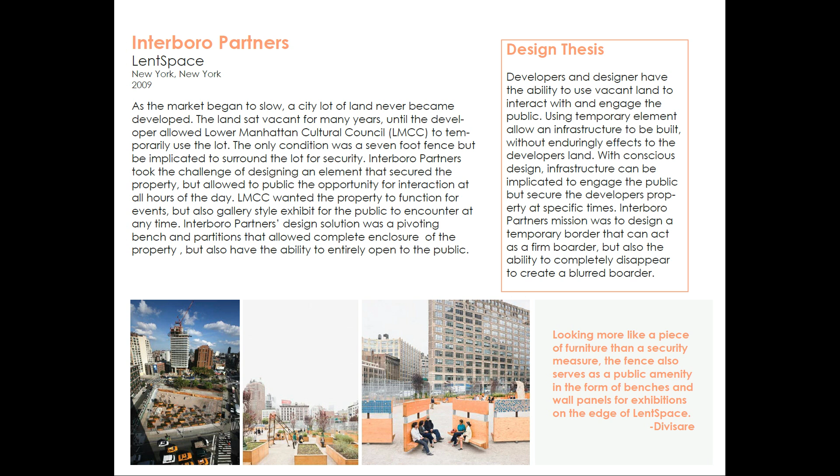This is a project where a vacant lot is temporarily converted into exhibit space for the Lower Manhattan Cultural Council in New York City. There are many discourses Lent Space addresses. The four that relate directly to my own thesis are visual and physical control, accessibility, private and public spaces, and temporary.

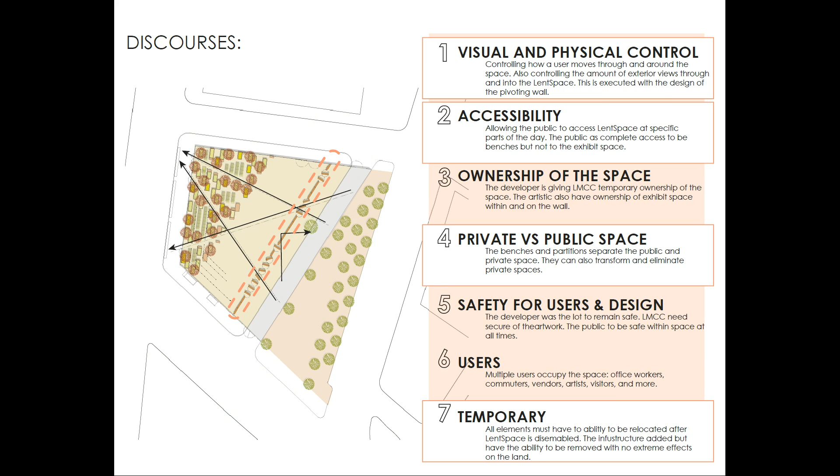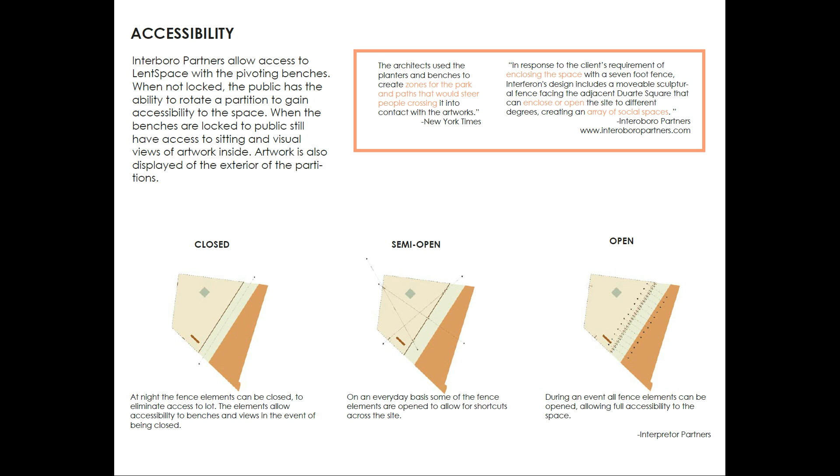The accessibility is directly related to these pivoting panels that are only located on one side. When they are all open, you are able to directly access the space. When they are all closed, you are not able to. They are also able to be in an in-between state that is semi-open.

These pivoting panels also relate to visual and physical control. When they are all closed, you are still able to visually see within from the slits at eye level. When they are completely open, the physical control allows you to access the lot. There are also two accesses that allow you from one side to the other side of the lot.

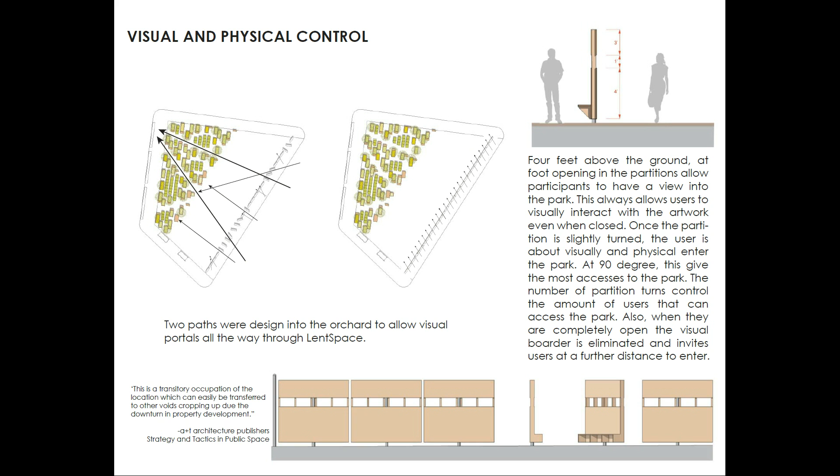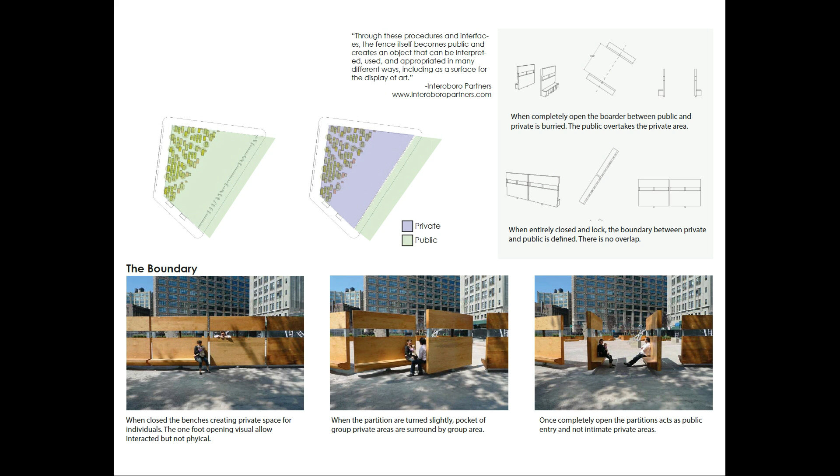These panels also address public versus private. When the panels are open, the space is public. When the panels are closed, the space is private, creating a boundary between.

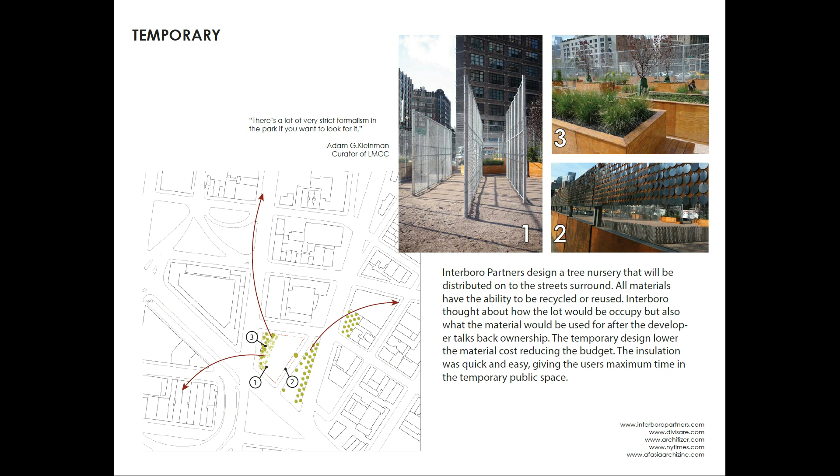The temporary part of this project is the material. The material is completely recyclable and reusable. The plants that are within the nursery are also designed to be relocated and distributed throughout the surrounding area.

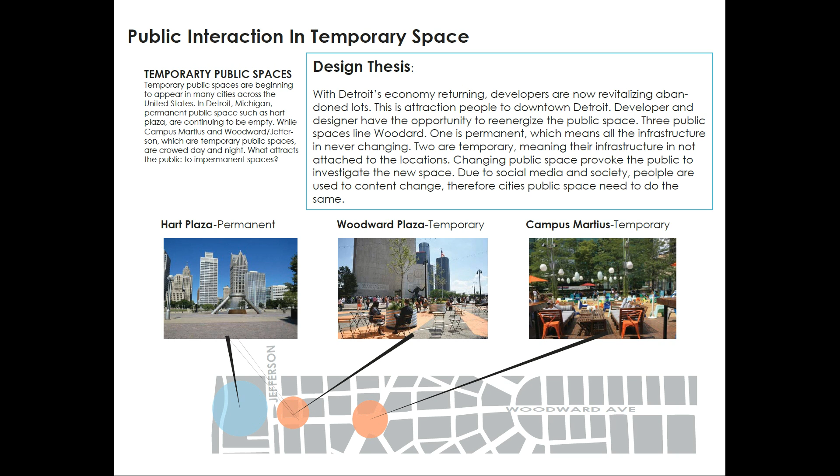My own thesis is looking into public spaces that are temporary. I looked directly at Detroit and how they use temporary spaces and also permanent spaces.

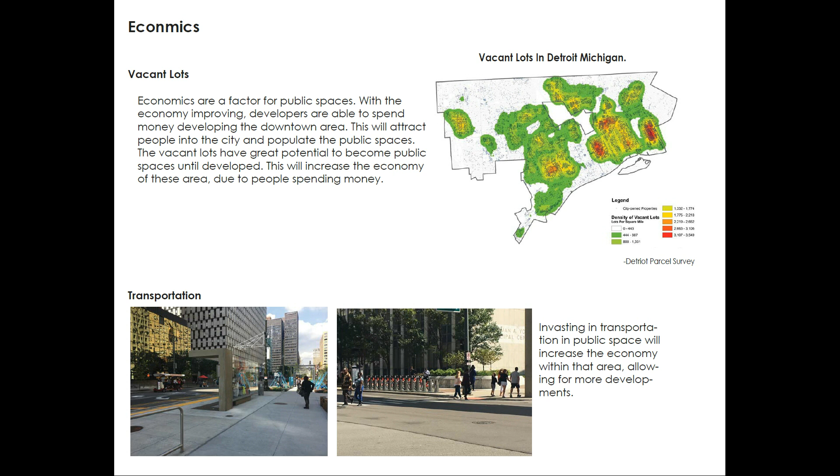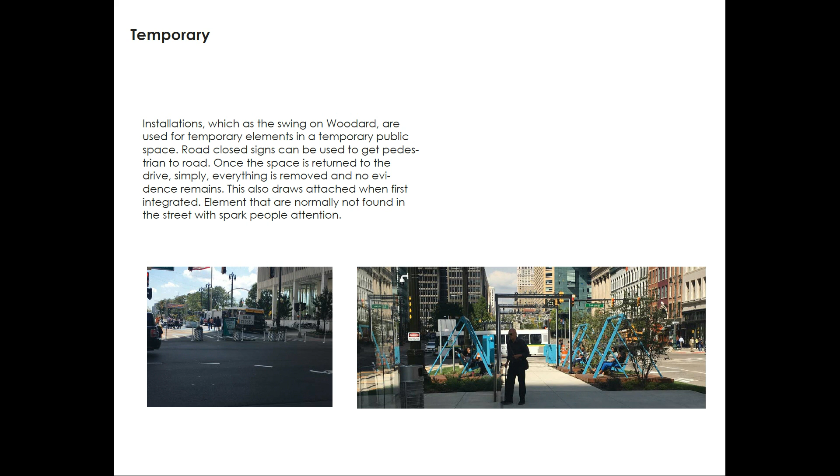The discourses I directly addressed are economics, constant change, enterprise, and temporary. The economics are directly related to the vacant spaces around Detroit and how public spaces are normally in dense areas. The temporary space looks at one specific area, Woodward, and how they closed Woodward down and used temporary elements such as swings to create a public space.

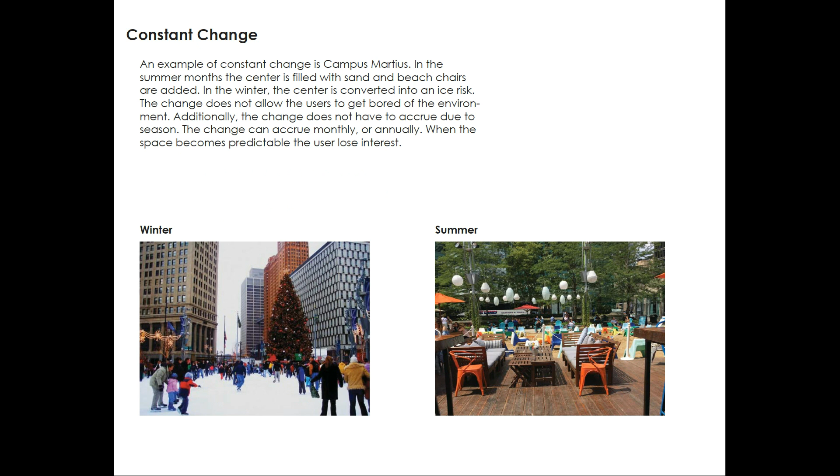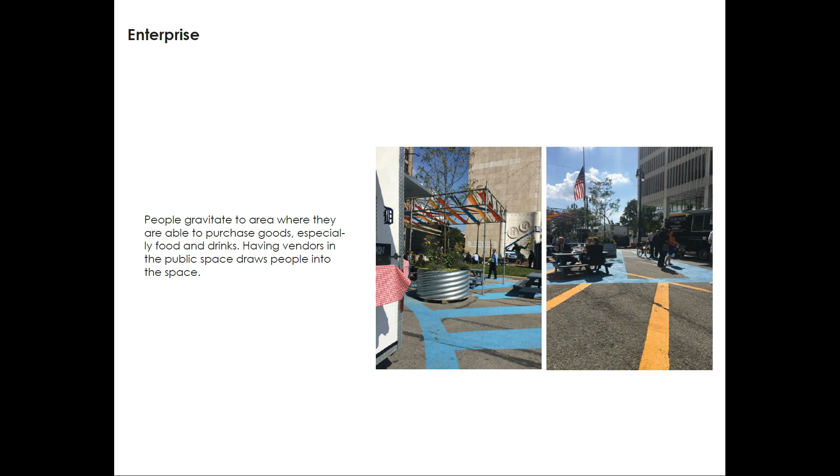Also looking at constant change, Campus Martius is constantly changing between seasons. In the winter, it is an ice skating rink. In the summer, it is a beach with a bar. Enterprise is a discourse because the public is directly interested in purchasing goods within a public space.

Looking at my own thesis, at this point I was unclear on where to take a direction. Therefore, I revisited my case study.

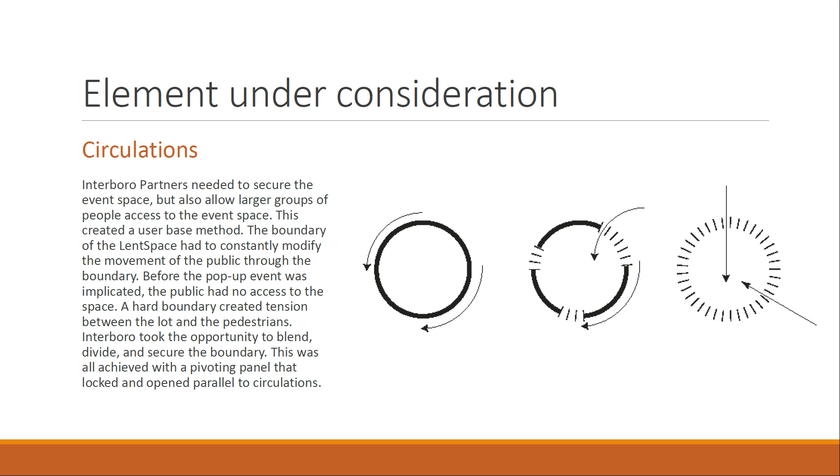Looking specifically at their research methods, I looked at how they addressed circulation. They knew that they needed to have a boundary that could be closed at certain points and open at others. They examined the edges of the space and realized that 3 of the 4 sides were heavily congested with traffic.

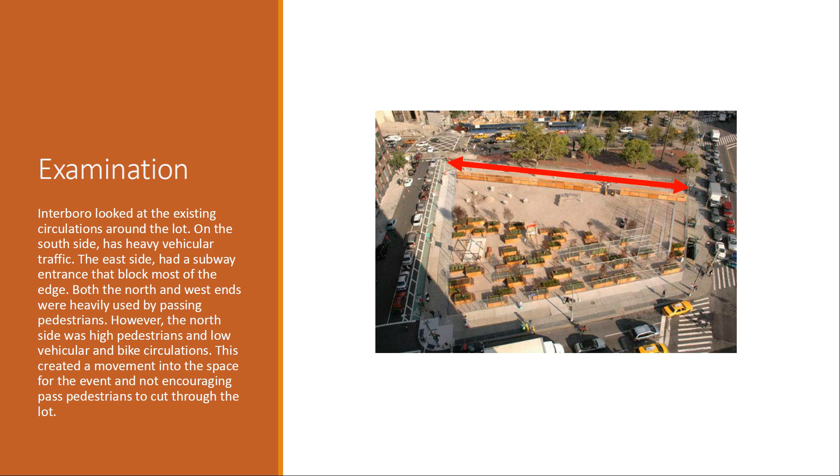On one side, there was no traffic allowed. Therefore, this was the best spot to allow access for pedestrians. The design of these panels allowed the space to be completely closed, completely open, or in an in-between state.

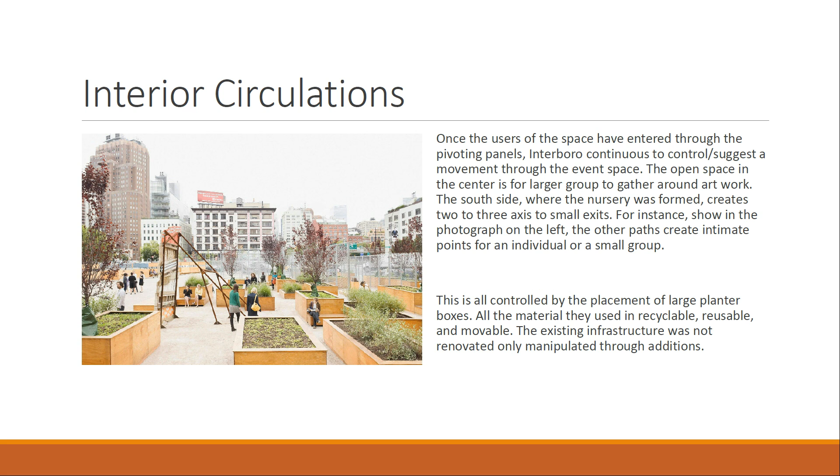The interior circulation is directly related to the program. The core allows large groups to gather for art exhibits, where the edges allow small groups or individuals to gather within the tree nursery. To develop my thesis more, I looked directly at pop-up architecture instead of a generic term of temporary.

I looked at pedestrian, traffic, and other modes of movement of circulation. I looked at different research methods, specifically looking at past architecture, mapping current installation, and circulation.

To define the circulation, I am looking at routes and paths through and around the built environment, specifically in how the pedestrians change their normal behavior due to the pop-up architecture.

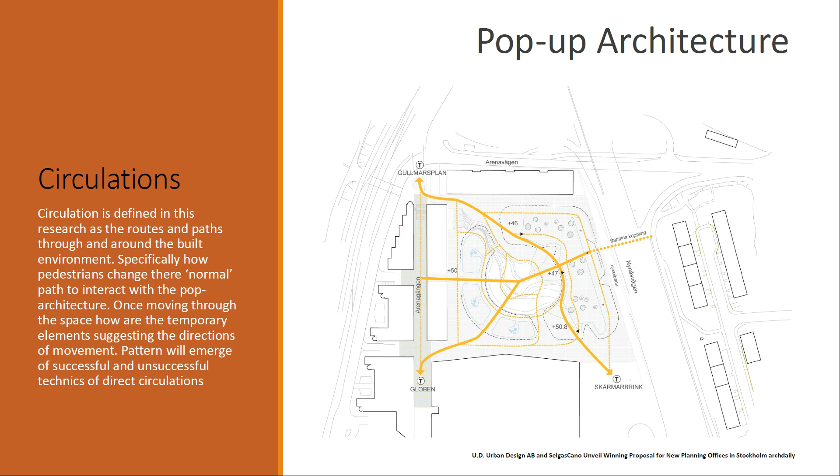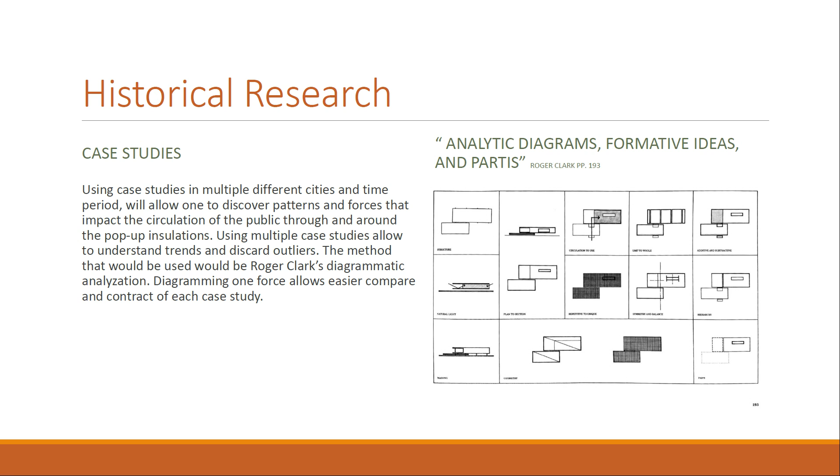Looking specifically at historic references that I am able to use as case studies, I will be able to examine them to look at patterns and forces. These patterns and forces will allow me to understand how things directly relate and how one has a cause and effect on another.

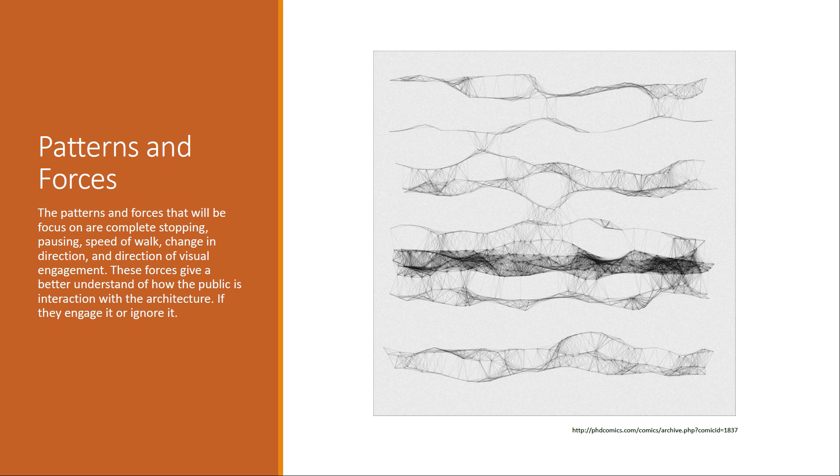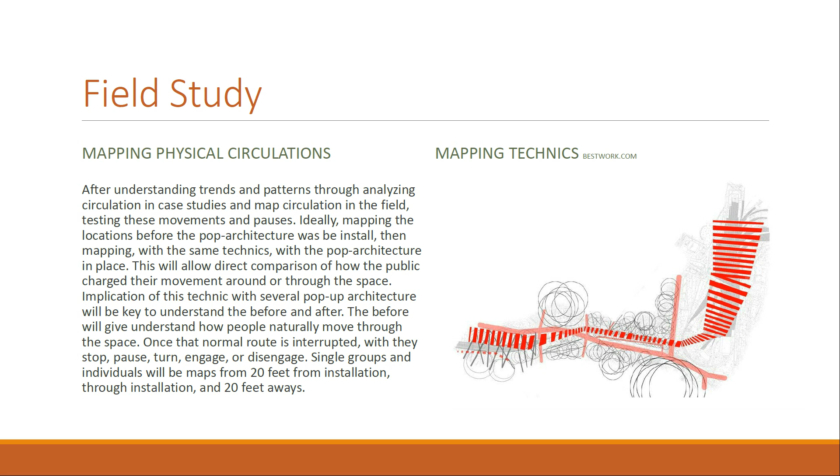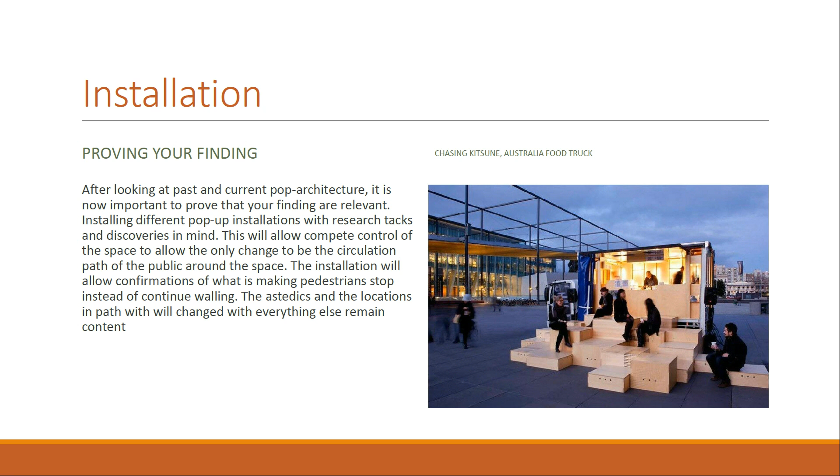Looking specifically at the field study, I will look at how pop-up architecture is impacting the circulation before and after it is installed. After understanding all of these things, I will then do an installation and be able to manipulate one or two variables. Therefore, I know exactly how the public is directly related to these.

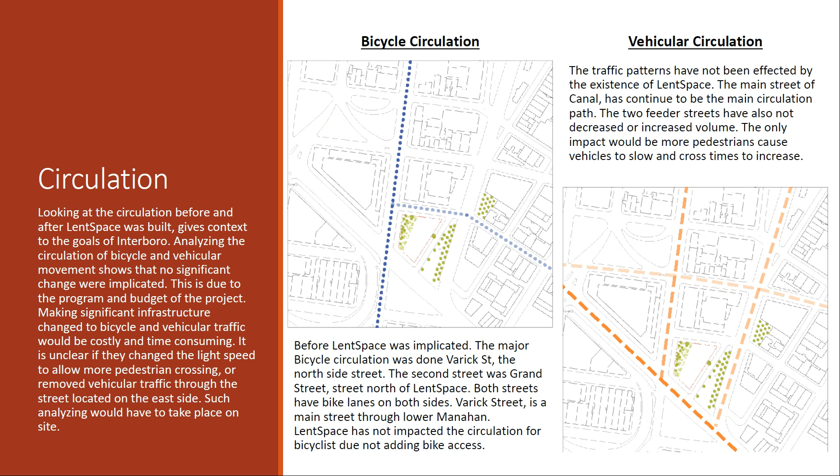Returning to my case study, I am now looking at the context within. Looking at the circulation and how they addressed it, there's no major changes between the bicyclists and the vehicle circulation. This is due to how hard it is to temporarily block traffic, where pedestrians are able to choose their path by visual cues. The before and after of this circulation is clearly defined.

Before, there was no interior circulation. Now, on one side, there's multiple paths that you are able to enter into the space. There's only 3 other spots that you're able to exit, not through the pivoting panels.

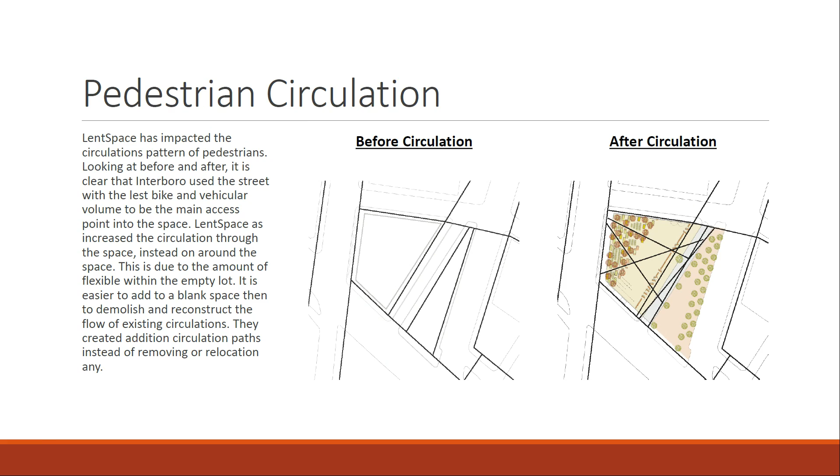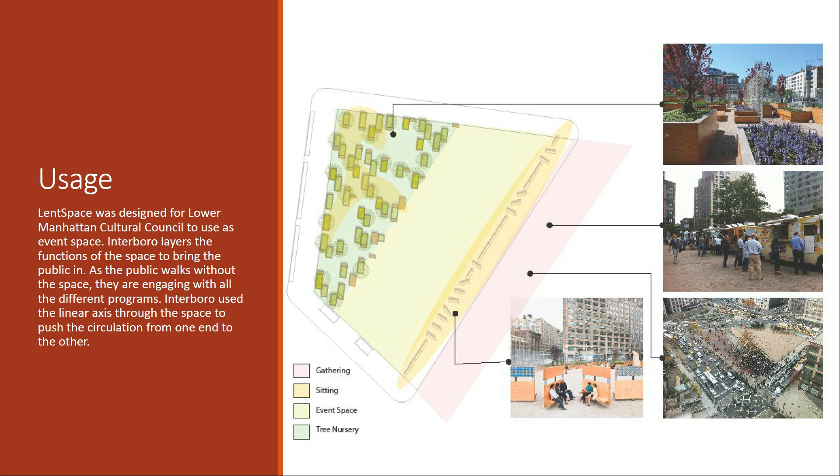The uses of this space are gathering, sitting, event space, and the nursery. They are layered on top of each other, allowing the public to access all of these different events while passing through. The materiality is completely recycled

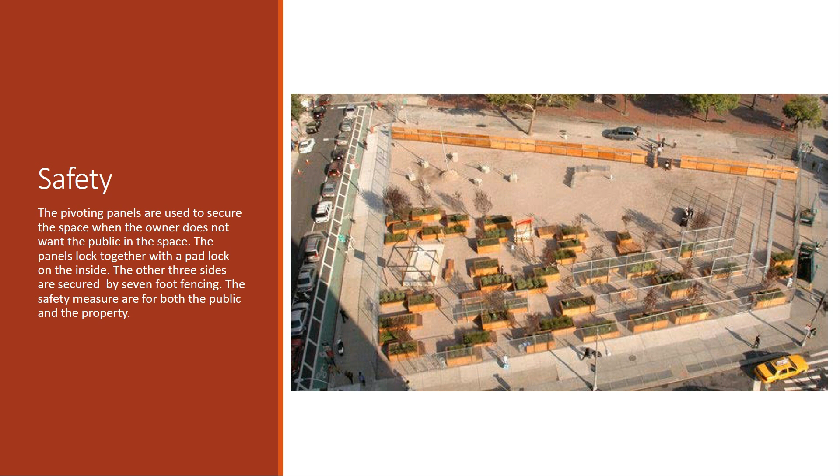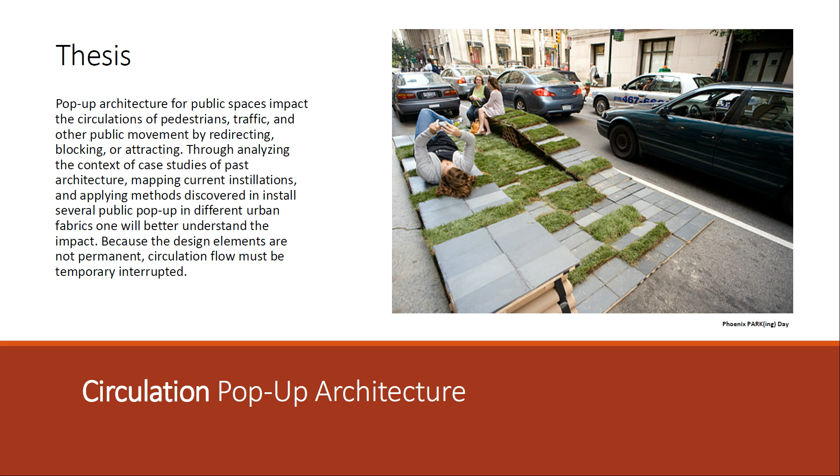and not permanently attached to the site. It is also a safety reason to keep some of these panels completely closed, therefore limiting the access into the site for the public. In my thesis, I began to look at how specific pop-up architecture impacts the circulation.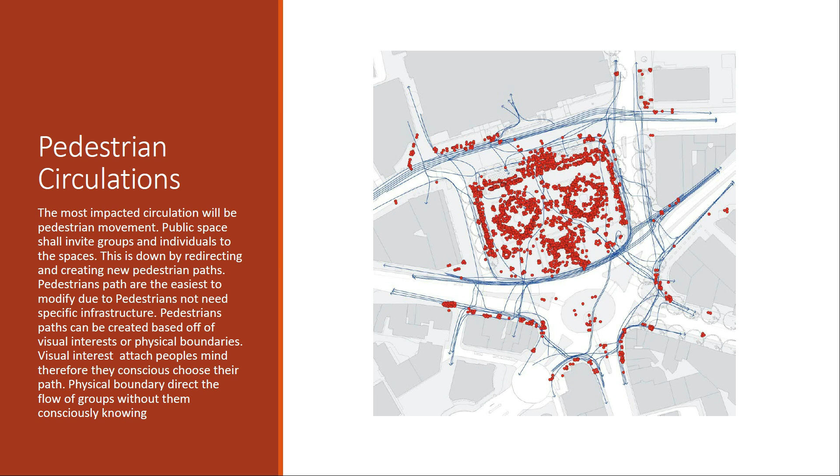Looking at the program, there are several different programs that public spaces have. Looking at the public circulation, specifically, the pedestrians take many different paths. Bicyclists either have a blocked path or they have complete access.

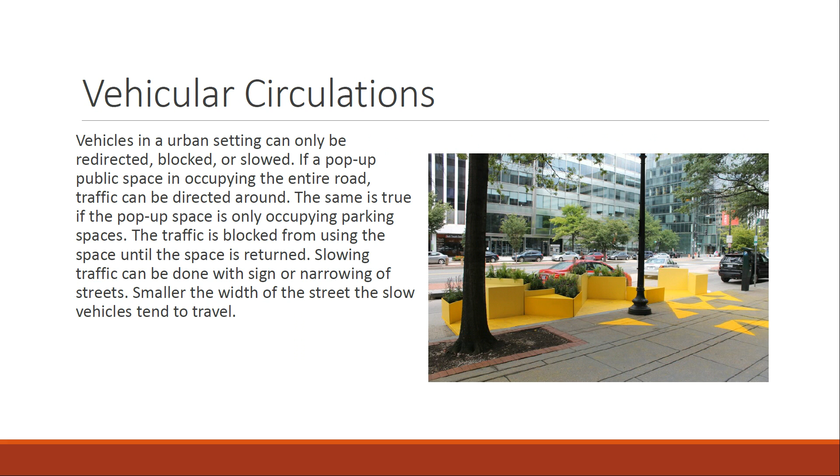Vehicles either are able to access the space or not. Safety is also important for these. Being able to block, create a boundary, or completely stop any of these into the space is very important.